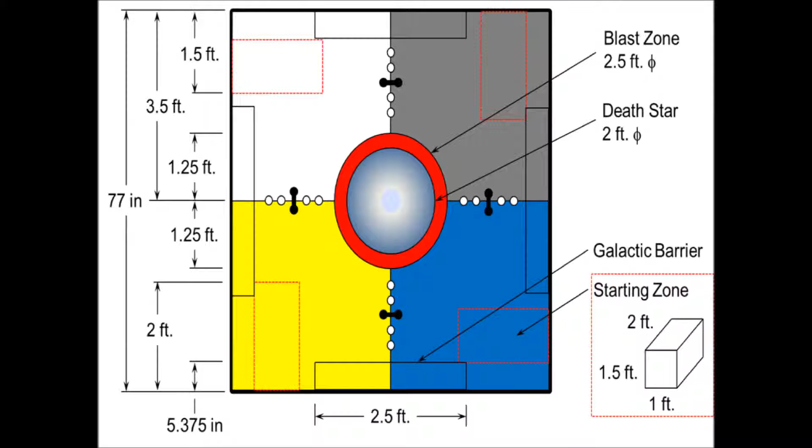In order to defeat the Empire, the machine has to be able to accomplish several tasks while starting inside of a 2 by 1.5 foot starting zone. It must torpedo the Death Star, it must launch the Millennium Falcon, it must defeat Darth UGA, and it must retrieve the fleet. The first design contains a large scissor lift and a rotating arm.

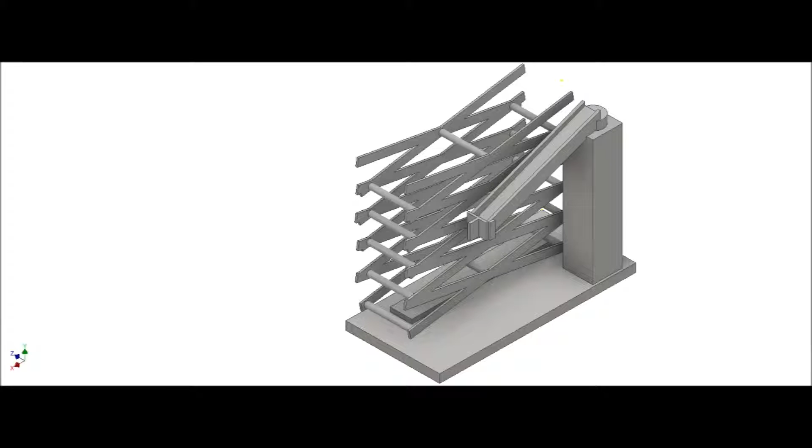The rotating arm dispenses the torpedoes, and the scissor lift lifts the Millennium Falcon. This design focuses on doing tasks that we have complete control over points-wise. For example, the scissor lift guarantees the highest height, which results in the maximum amount of points. This is why it ranks high in reliability and simplicity, but low in potential score.

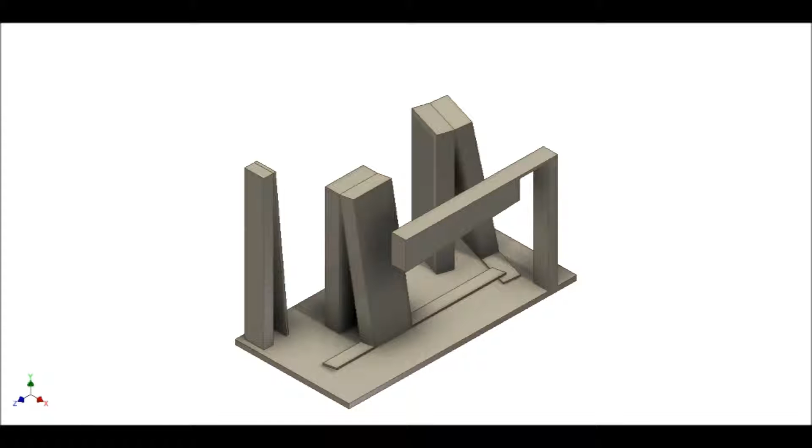Our second design features rollers with taped ends, a swing lift, and a rotating arm. The rollers would slide out from the base and then hit the Darth UGA, and at the same time they would adhere to the ping pong balls and later be retracted into our quadrant. The swing lift would raise the Millennium Falcon above the minimum height requirement, guaranteeing 10 points, and our rotating arm would dispense ping pong balls into the Death Star.

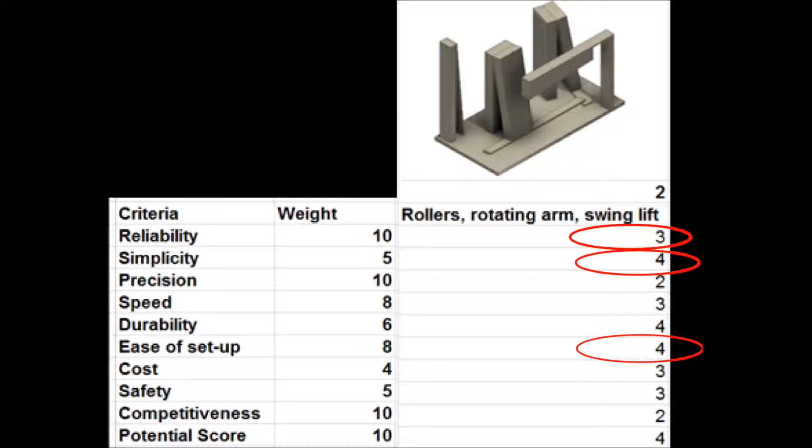Rollers were chosen because they were reliable in the subsystem competition, but with the addition of the taped ends, their reliability was lowered. This system has a high ease of setup and simple design, which would reduce trouble in the building phases.

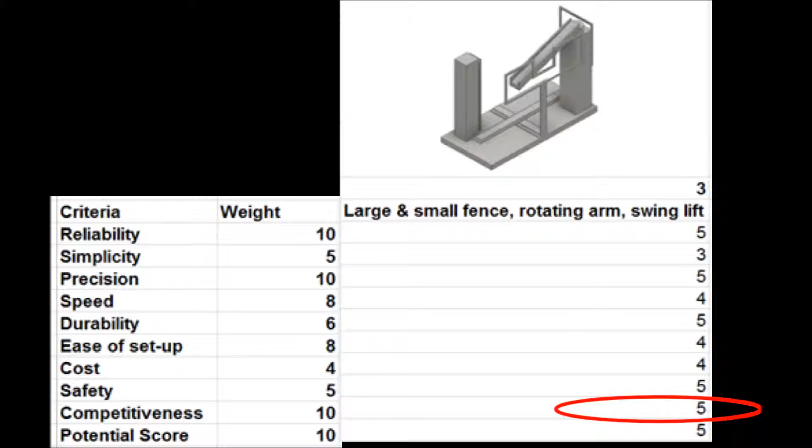Design 3 contains 2 fences, a rotating torpedo arm, and a swing arm. The fence on the right swings towards the floor to separate the fleet and the bone, then pushes the bone outward and retracts to collect the fleet. The fence on top does a similar thing, but only collects 2 of the ships. This design is more competitive because it sets up a natural barrier to protect the fleet and keep the UGA out.

Our fourth design features a moving base, a turnstile dispenser, and a swinging arm. The swinging arm would raise the Millennium Falcon above the required height. The turnstile dispenser would move towards the Death Star and then release ping pong balls into the rotating targets.

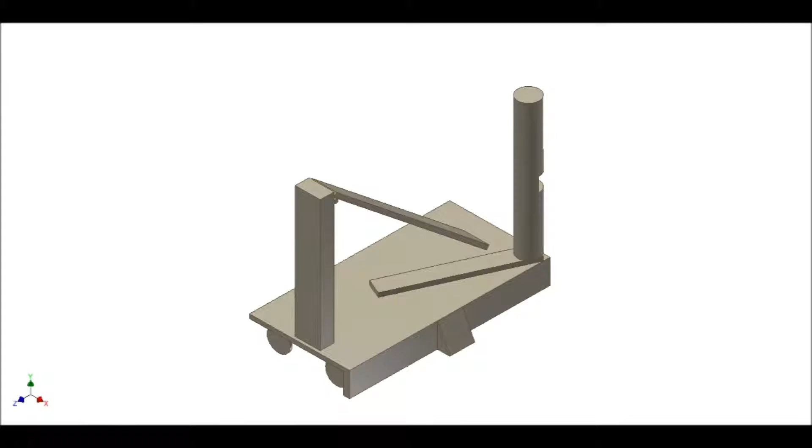While this is happening, a moving base would move the entire system towards the Darth UGA that's furthest from the system, knocking it out of our quadrant, and at the same time an adhesive side would stick to the ping pong balls, allowing us to collect them. This design is a fairly simple design, but it has low precision and low speed, as we have to wait until each task is completed before the system can be moved.

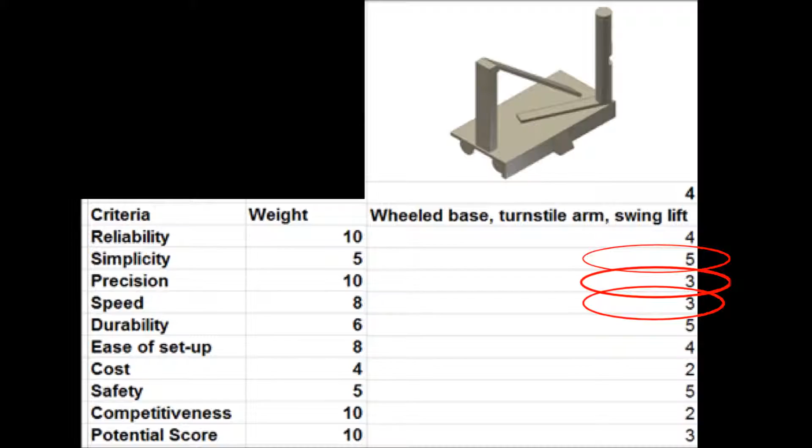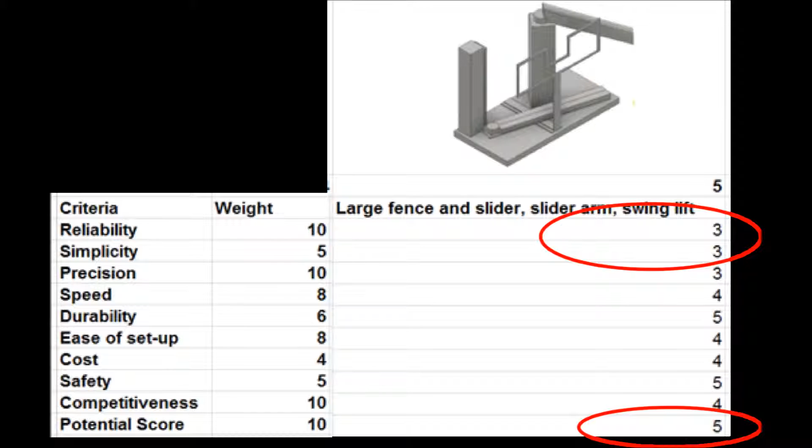Design 5 contains 1 fence, a slider torpedo arm, a swing arm, and a double arm system that sweeps apart to collect the fleet. This double arm system extends to push out the Darth UGA and then splits in half to sweep the 2 sides of the fleet inwards. This is the ideal case because it completes all of the tasks, but this concept requires very complicated systems.

When the scores in the value matrix are added up, you can see that Design 3 has the highest score, mainly because of its ability to perform reliably, with precision, and have a high potential score. When considering which design to select for final production, the team determined that one of the most important and complex motivators was the potential point scores of each design.

For this reason, the team created a separate, specialized evaluation matrix to break down the predicted score of each design into its component subfunctions. These were weighted with the point value of that subfunction in the final competition, and probabilities in graduations of 25% were assigned to the completion of each component of each subfunction. These predictions were used to determine which design would be most likely to achieve the highest score.